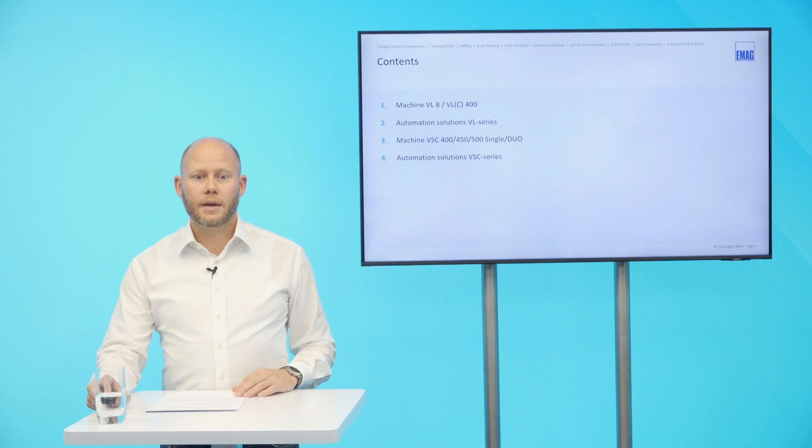We will begin with the VL series, and I will give the word to my colleague Konstantin. Thank you, Bernd. Here you can see a small overview of the VL series. The VL machines are the standard lathes at EMAG. I will briefly describe the different series.

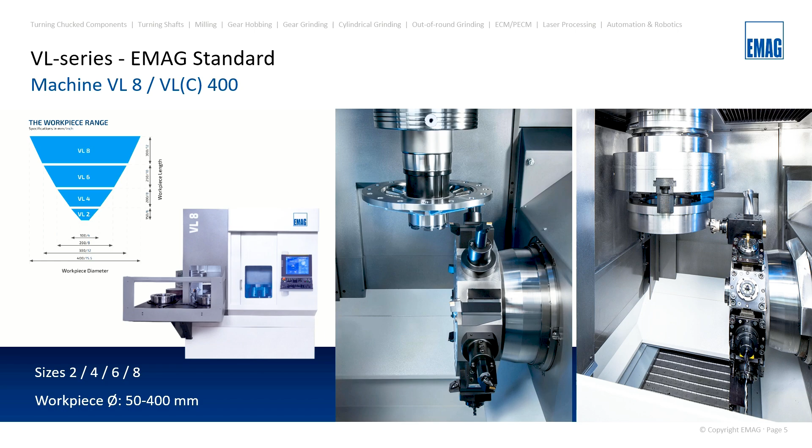In this slide we see the VL2, VL4, VL6, VL8, which differ only in component size. You can also see a section from the working area of our lathes. On the right, the turret with 12 places and the possibility of driven tools. For completeness, you can see the technical data such as chuck diameter, workpiece diameter, and the travel feeds in X and Z axis. We also have, as an option, a Y axis if necessary for the process.

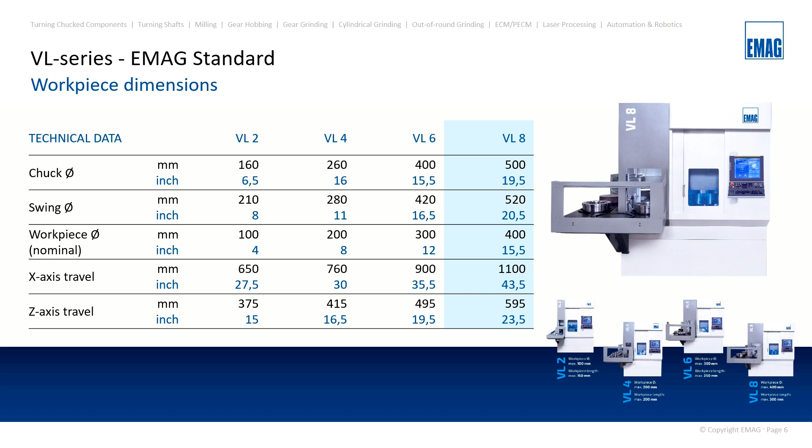Today, however, we only want to talk about the VL8 and our automation solution.

In the previous slides, we discussed the workspace and the possible size of workpieces. Now we show you the exterior structure of the machines and the associated components. In the front, the workroom door. On the right side, the control panel. On top of the machine, the spindle, the vertical spindle. On the right side, the electric cabinet, and behind it, the fluidics cabinet.

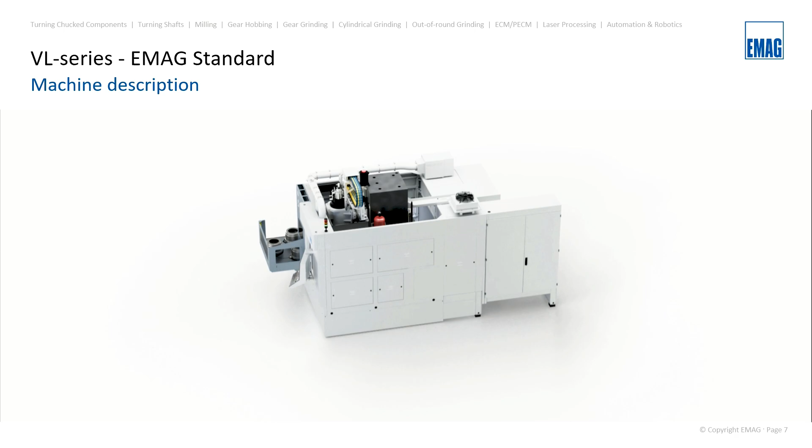Also on top of the machine, the extraction unit for the workroom and the cooling unit with the black fan. On the left side of the machine we see our so-called O-type conveyor, which is our internal standard automation in the VL series for manual loading on drag frames or workpiece-specific pallets.

Now I give the floor to Bernd. Thank you, Konstantin. I will follow with the automation solutions for the VL series, and for that we have prepared a 3D animation.

As we have just seen, the O-type conveyor is the standard solution for internal automation on a single machine in the VL series. If a machine is interlinked with a robot cell or several machines are connected together, the L-shuttle is used for automatic workpiece loading of the machine.

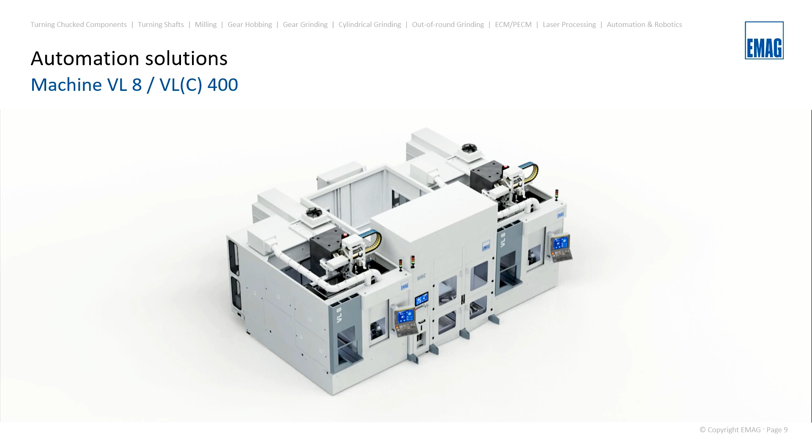Here you can now see our standard robot cell that can be attached directly to the machine. Furthermore, there is the possibility to add a second machine, then the robot supplies both machines.

The interlinking of machines can also be carried out via our in-house automation system, the so-called track motion. This track motion is a solution for 2 to 4 machines. The integration of other units, for example measuring or marking stations, is also possible.

The track motion travels through the automation tunnel of the machine on a railway system and transports the workpiece from one machine to another with an NC-controlled trans-lift unit. The workpiece can also be turned between stations. The in-feed and out-feed conveyor are also controlled by the track motion automation system.

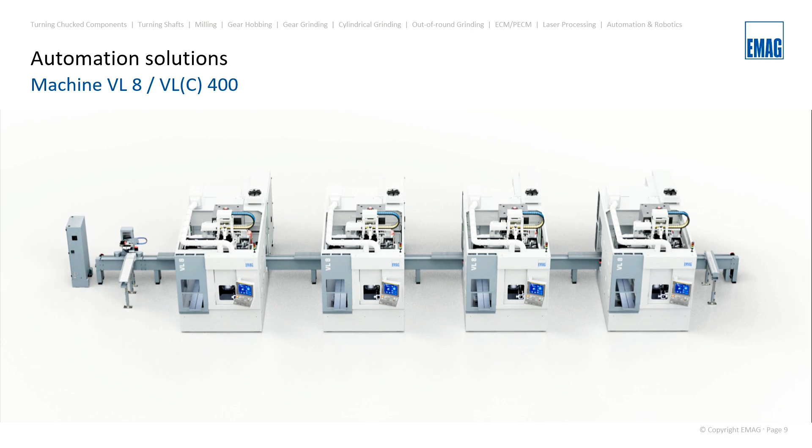This was the theory. Now we have the first realized project. This is only one machine with an O-type conveyor, but it has an interesting solution because we have the possibility for complete machining of the workpiece in 2 clamping positions on one machine.

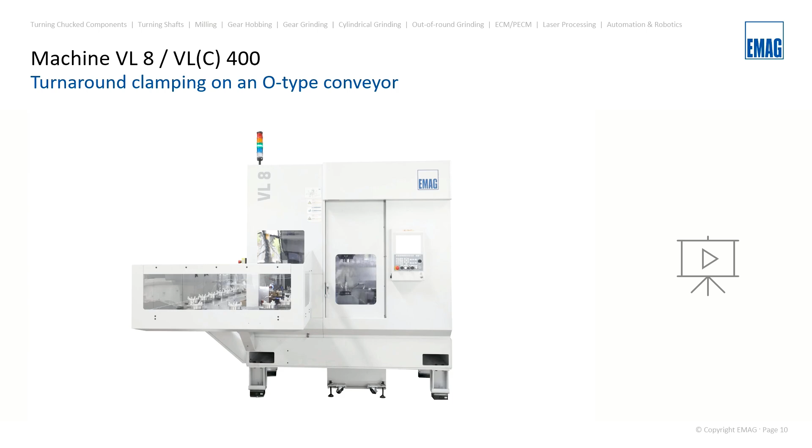The loading and unloading is with our standard automation, the O-type conveyor. With a turning station behind the pickup station, it gives us the chance to produce OP10 and OP20 if the diameters are similar, such as here in the example.

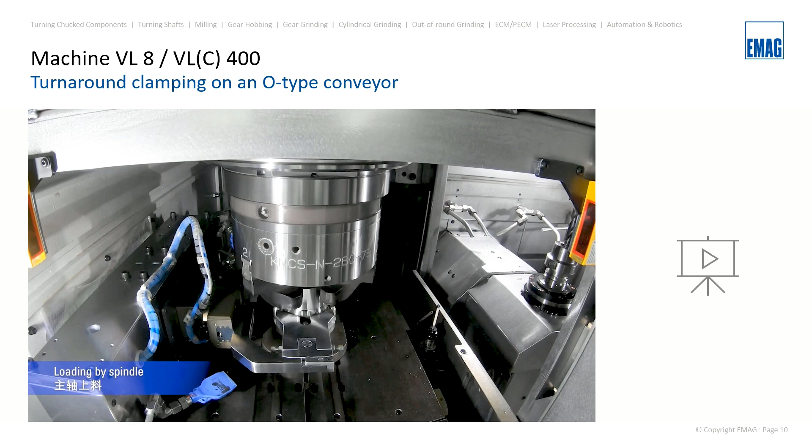As soon as the spindle has placed the OP10 workpiece, the station turns the component for OP20 and moves to a lower position so the spindle can grip the part. After OP20, the spindle places the component on the conveyor again and moves out of the machine.

Here you can see the raw and the finished machine parts.

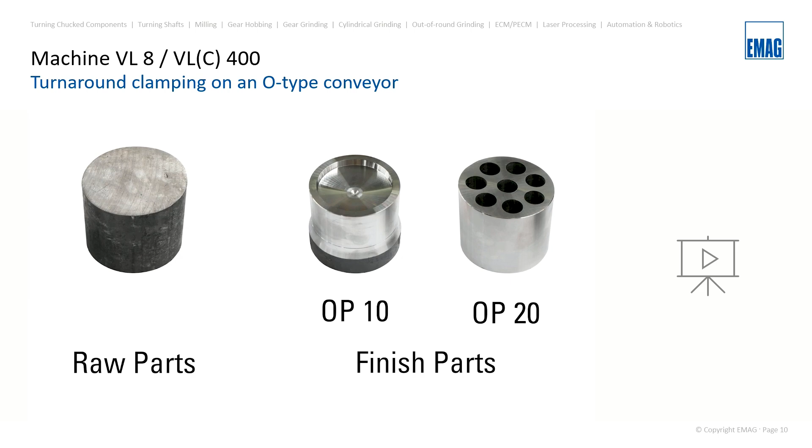The next example is a line which consists of 2 machines of the type VL8. This is a complete turnkey solution, a solution with a linear robot that can move in the axis.

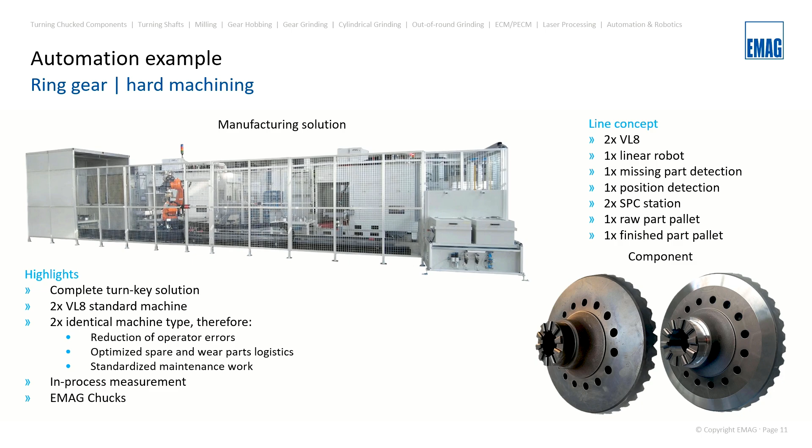We have as workpiece a ring gear, and the machining is a hard turning. The line consists furthermore of a missing part detection, a position detection, 2 SPC stations, 1 raw part pallet and 1 finished part pallet. Important to know is that both machines have the same machine content, so we have 2 machines with an operation 10. And therefore we have also a video prepared.

Before I start, I would like to explain that this workpiece must be aligned between the tooth flanks of the gear. Before this workpiece, it must be orientated. In this case, a laser is used. Now I start the video.

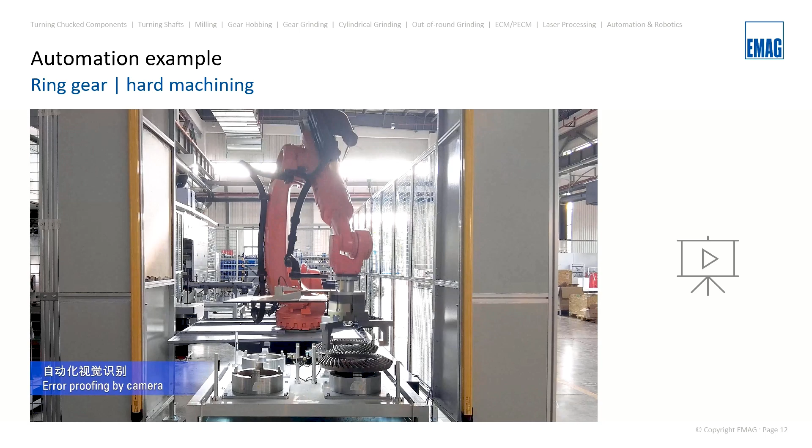First of all, there's an error proofing by camera attached to the robot. Then the picking up of the workpiece, and here the checking of the gear orientation with help of the laser. Then the orientated part is picked up and the toothing with the clamping device.

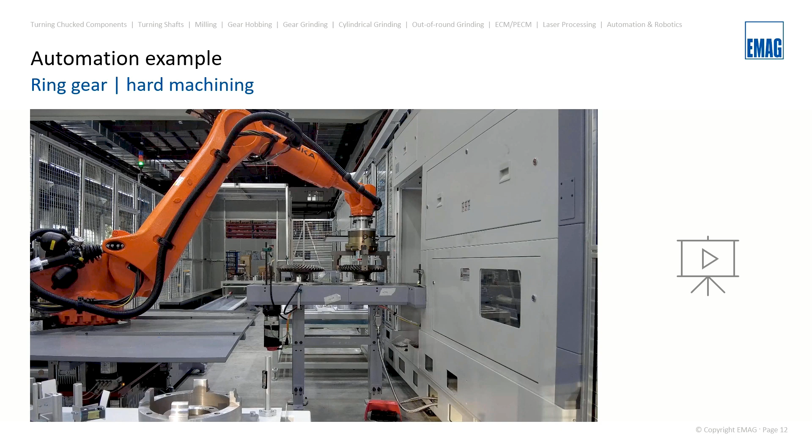Now you see the hard turning of the workpiece. After machining, a new raw part is loaded on the shuttle and the finished part is being unloaded by the robot.

And for the next example, I will give the word again to Konstantin.

Thank you. But we have a question from our audience. What is the difference between VL 8 and VL 400? Good question, I can answer this.

The VL 8 machine and also VL 2, 4, 6, they have a Fanuc control. And the other machines, the VL 100, 200, 300 and 400, they have a Siemens control. That is the only difference, and here we have the same machine. Okay, thank you. You're welcome.

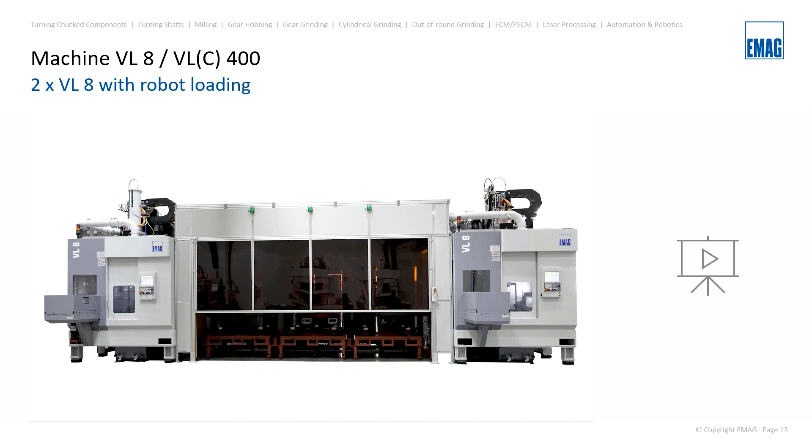In this example, we show you a video from VL 8 with the robot, with a robot cell in the middle of the line. Loading the raw parts. And now a visual position detection with the camera attached on the robot.

In the next step, we go to the regripping unit to turn around the workpiece. And now the component is placed in the OP10 on the raw part pallet. Unloading the finished part in OP10 from the shuttle. Here you can see how the workpiece is picked up by the pickup station directly with the spindle.

Now let's jump right into the finished part measurement with our internal test probe. And we measure the inner diameter.

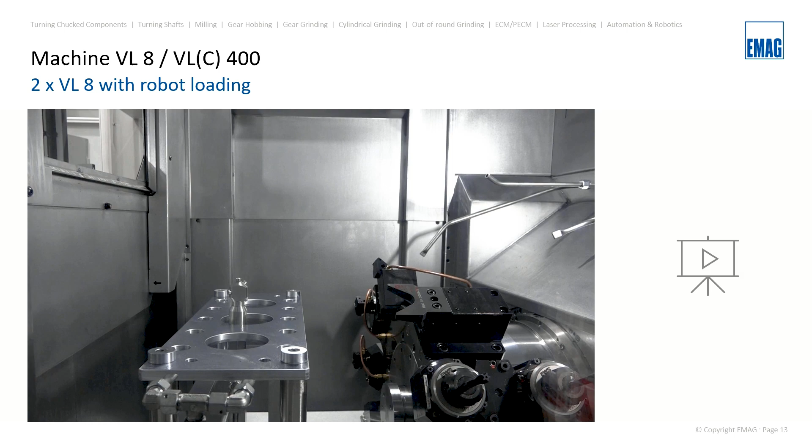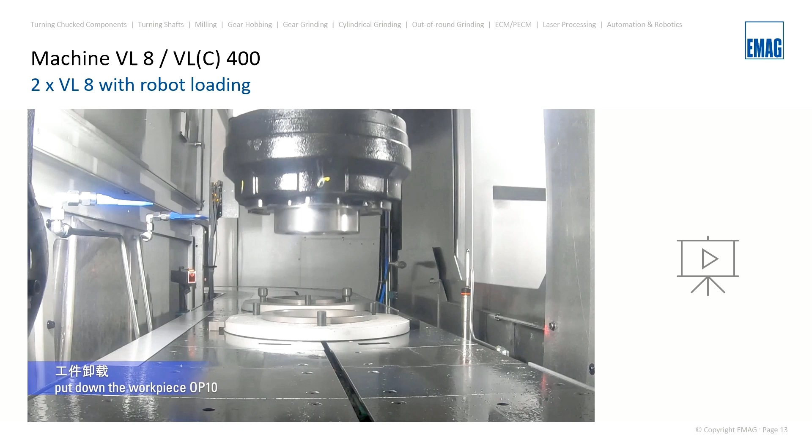Now we drive to the pickup station for unloading the parts on the workpiece pallet. Again, turn around the workpiece for OP20. And place it on the shuttle for OP20. After loading, we unload the finished part on OP20.

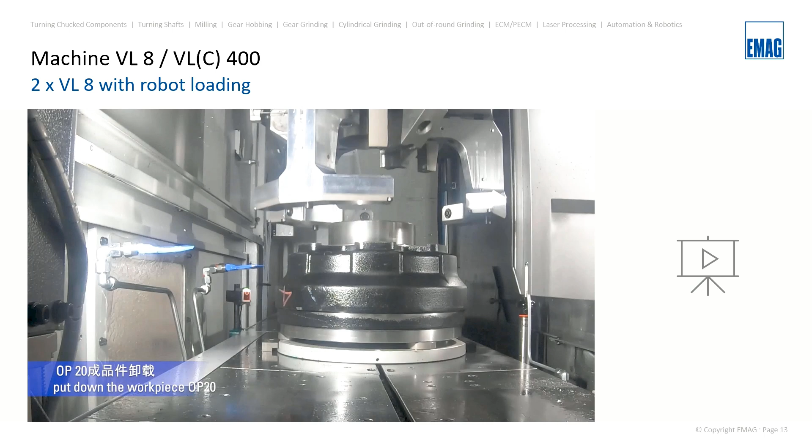In this case, we have an external clamping on the OP20 in 2 planes. The OP20 part is also unloaded directly. We have taken it out of the machine. Clean staging of the finished part.

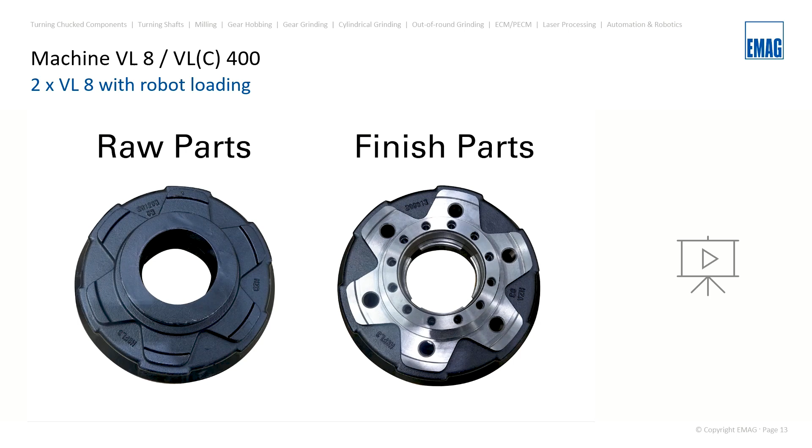After the cleaning, we drive again to the regripping station to turn around the part. After this unit, we are loading the finished part onto the pallet. And here we have the comparison of raw and finished part.

Here we have a simulation of the layout shown above. EMAG has the ability to use the simulation to analyze sources of error, increase capacity, and determine the use of buffer strategies through the different configurations so that the best possible availability is achieved.

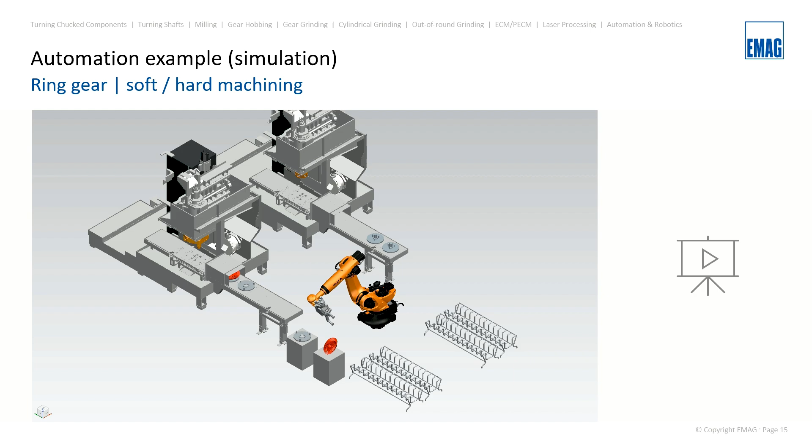And now we go to the VSC series. And then, Bernd, please. Thank you, Konstantin, and thank you for the last example. This is an important tool, the simulation, to get the best availability for our customers.

To start with the VSC series, the C in the name of the machine stands for customized. These machines are intended for customer-specific applications.

What does this mean? First of all, I can show you on the right side here. This is a work area with our standard turret with 12 positions, and of course, the possibility of driven tools. You need these driven tools for milling or drilling operations. However, there is also the possibility of implementing special applications with these VSC machines.

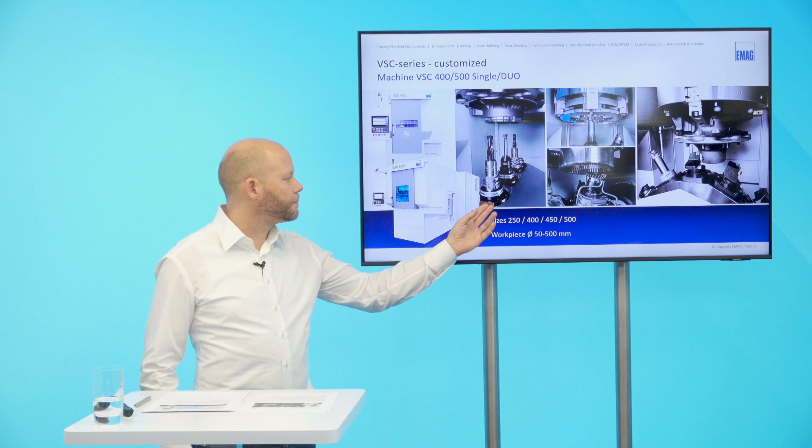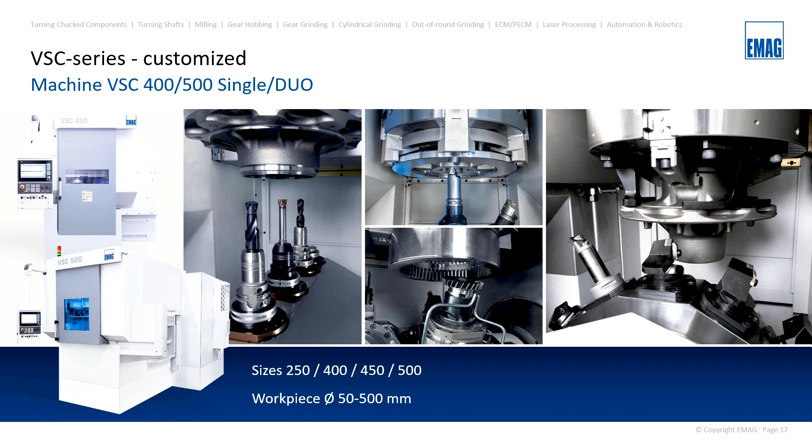For example, on the left side here, you can see a multi-head drilling unit. A multi-spindle was mounted instead of the standard turret. This was removed, and the unit is only for drilling and reaming. Furthermore, the machine can be equipped with an additional milling spindle. You can see this in the middle. Here, for example, you have the possibility to make a power skiving operation.

We have again a question about automation in the VL series: up to what diameter can track motion be used?

The track motion, our internal automation system, can be used with the same diameters as the machine. For example, when you have a VL8 machine, the maximum clamping diameter is 400 millimeters, and the automation system can also handle parts with a maximal diameter of 400.

It's clear, thank you. You're welcome. Okay, then we go further on.

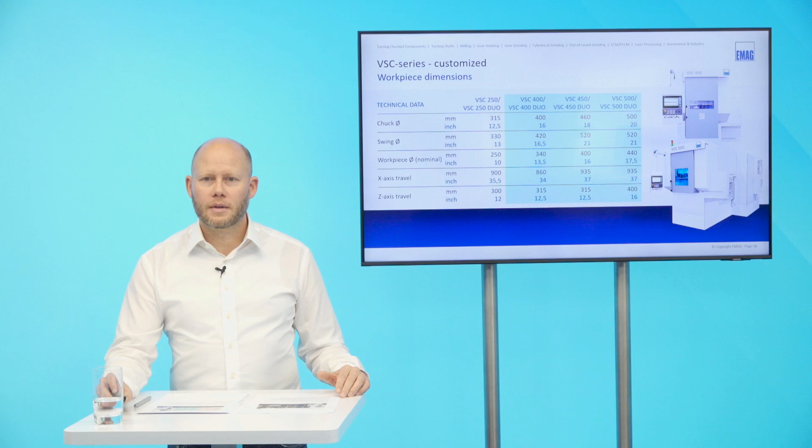Here you see the technical data of the machines. We have 4 machine types of different sizes: the VSC 250, the VSC 400, the VSC 450, and the VSC 500. All machines are available both with a single spindle and with a 2-spindle version, the so-called duo solution.

For you as a customer, the maximum workpiece diameter is important, and we can go up to 440 millimeters for our biggest machine, the VSC 500. Today we want to take a closer look at the sizes 400 and 500 and show our implemented automation solution for these machine types.

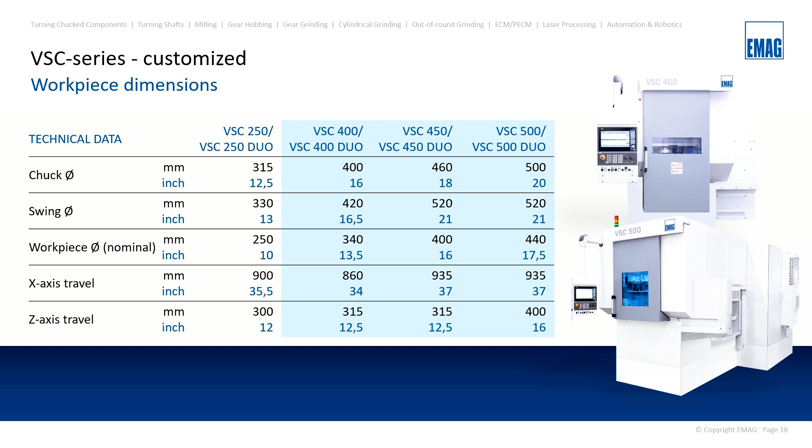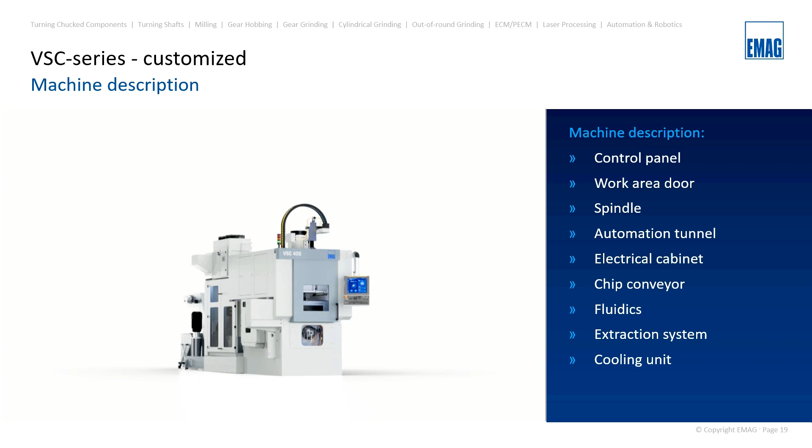First of all, we have prepared a 3D animation to show you and describe the machine itself. At the front you can see the workroom door with a view inside the workroom, and on the right side the control panel.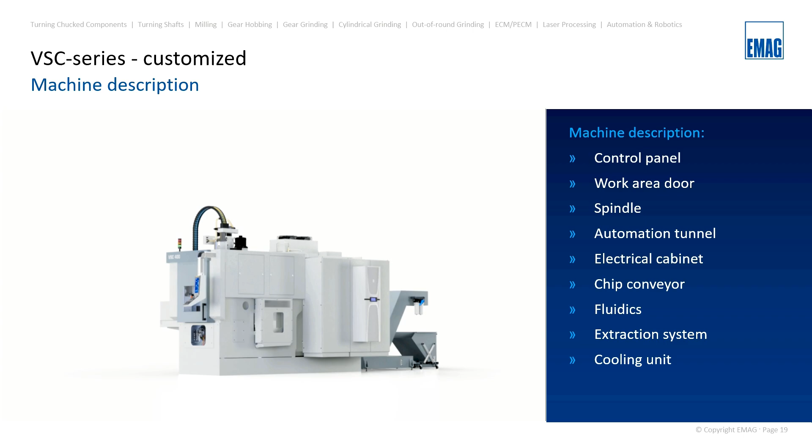On the top view you can see the spindle, which is arranged on a pickup station, always in vertical position. Now you see the control cabinet, and in the back the chip conveyor, which can also be arranged to the left or right side of the machine.

We have the fluid container on the left side of the machine with all pneumatic and hydraulic units, and on the top we have an extraction unit on this side, and the cooling unit also on top of the machine.

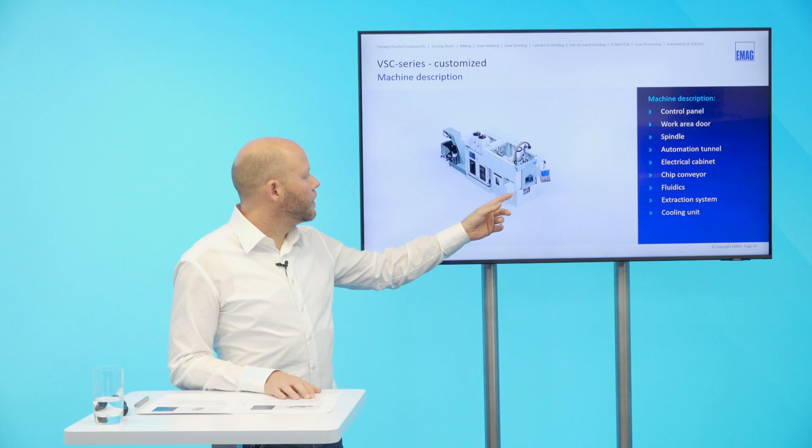Important is also this automation tunnel, in the backside of the working area. In this automation tunnel there is space for the workpiece conveyor belt, which we call the shuttle. On this shuttle the parts are transported into the machine to the spindle, which picks up the workpiece with the help of a chuck.

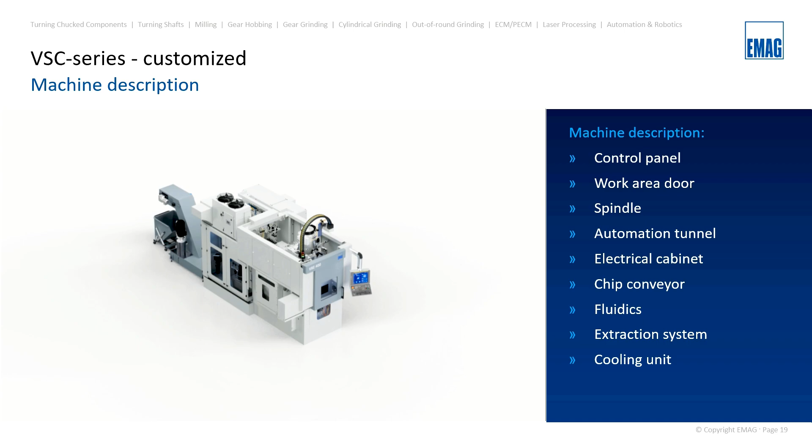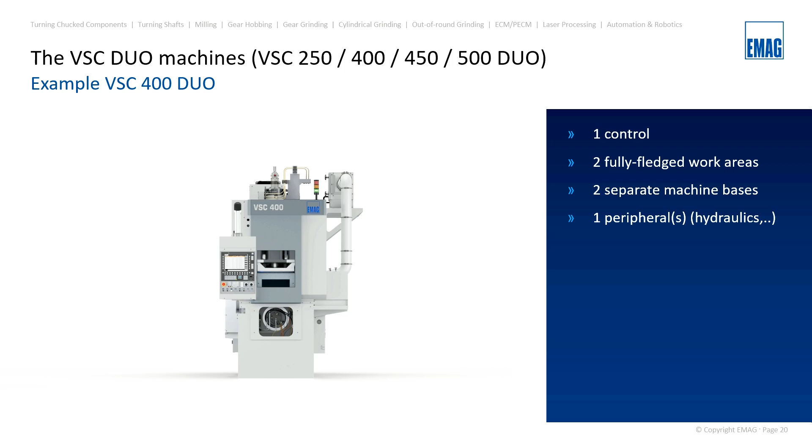Now we explain how a single machine becomes a duo machine. A duo machine consists of two separate work areas: two individual machine beds integrated into one machine together, but with only one control and energy container. The big advantage is that these two separate base bodies prevent transmission of vibrations during machining.

These two separate spindle boxes are universally movable in all axes, so they are not coupled. You can do operation 10 in one and operation 20 in the other work area.

The turning of the parts between the operations takes place outside the machine. This machine is often used when the customer has little space available on the shop floor, because we have the smallest space requirements for complete machining of a part in two clamping positions.

For the next automation solutions of the VSC series, I will give the word to Konstantin, and he will present the first solution. Thank you.

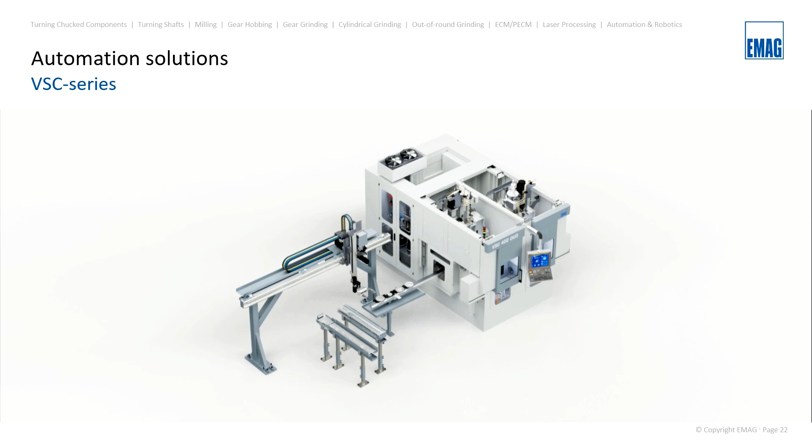Here we can see a simulation of different automation solutions. A single machine with shuttle on the left, possibly also on the right. The shuttle can be loaded directly via robot or via an EMAG gantry loader with a loading and unloading conveyor.

In this example, with one gantry loader, we have the option of machining up to 4 operations, with the flow direction from left to right. The component would be transferred from the gantry loader to the machines via an in-feed conveyor, where the processes OP10 and OP20 are performed.

The gantry loader then collects the semi-finished part and places it on the shuttle into the second machine, on the right, where operations 30 and 40 are processed. The finished part is picked up again by the gantry loader and placed on the outfeed conveyor for unloading.

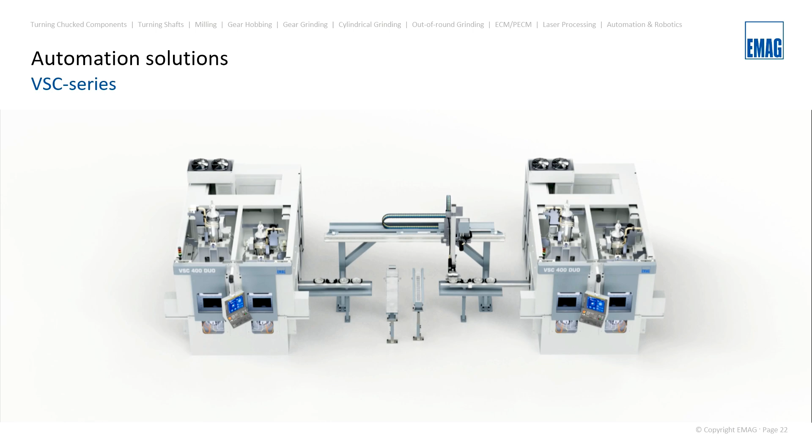Here we see a short simulation from above. On the left, you can see the dual machine with a shuttle and the gantry loader, and the infeed and outfeed conveyor. The sequence is: the gantry takes a part from the infeed conveyor and places it on the shuttle. The gantry takes the OP10-finished part and places it on the pallet of OP20. It then picks up the complete finished part and takes it to the finished part conveyor.

Here again is an automation example from VSC 400 DD machines for the truck differential housing. It's a complete machining line. We have 3 VSC 400 DD machines, 2 gantry loaders, 2 SPC drawers, 1 raw part conveyor, 1 finish part conveyor, and 1 cooling system. It's a complete turnkey line—machines and automation all complete from EMAG.

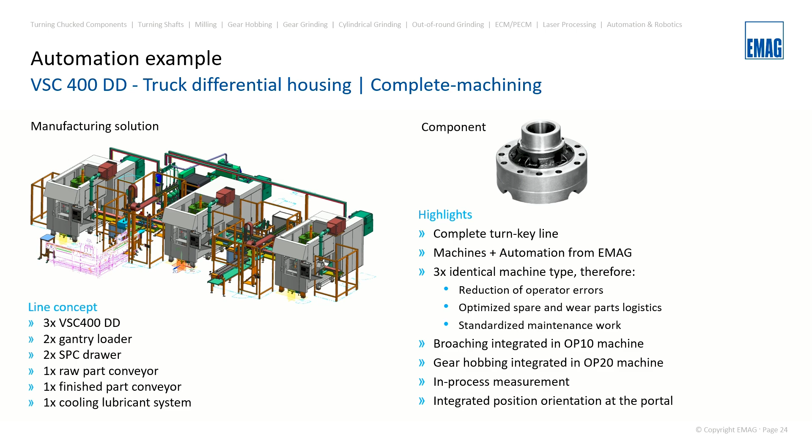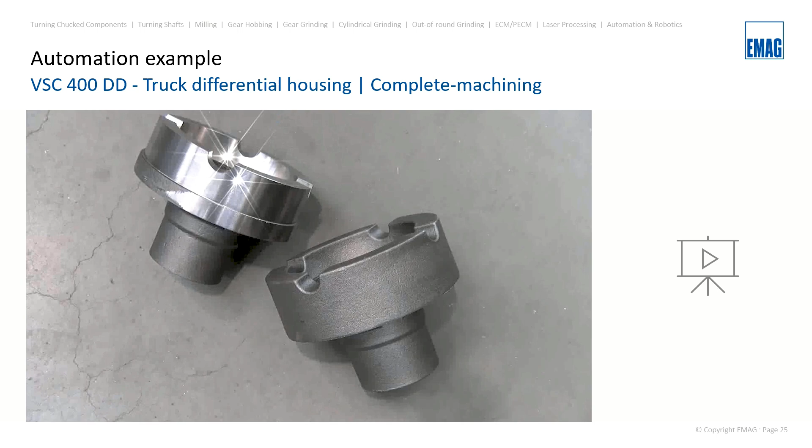Here you can see how the blank is gripped with a gantry loader and the orientation is determined by a sensor. The workpiece is pre-oriented and placed on the pallet.

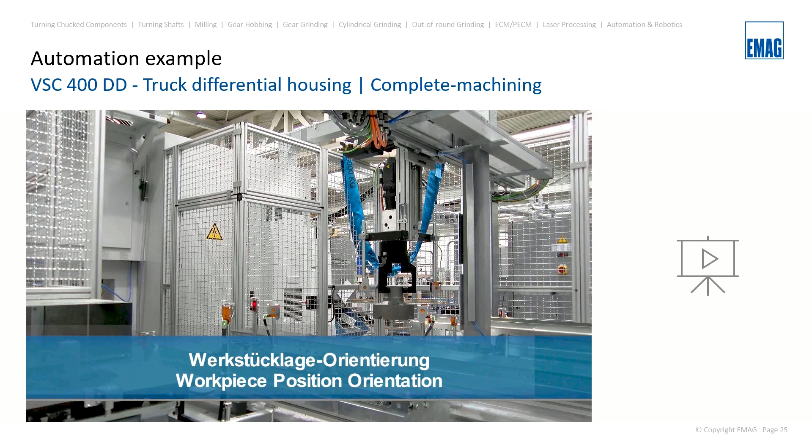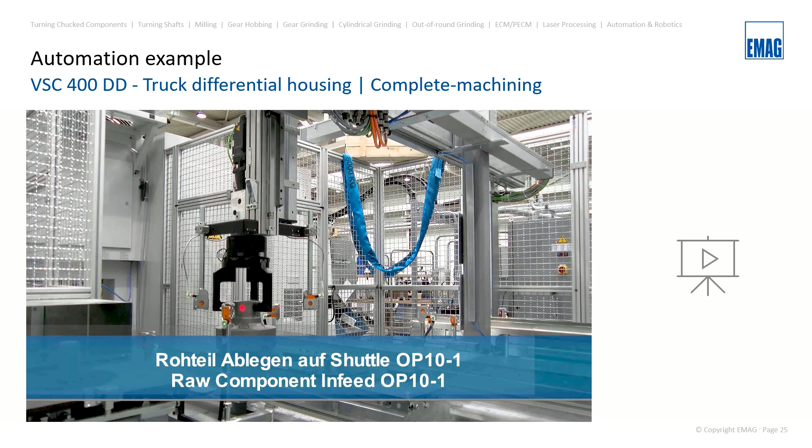Now we drive into the machine with the shuttle. The sensor performs the fine orientation in the clamped state. You can also see a small section from the machining process.

Milling the groove, deburring the groove, and broaching the groove. After the machining, the part is placed back on the shuttle and moved out of the machine.

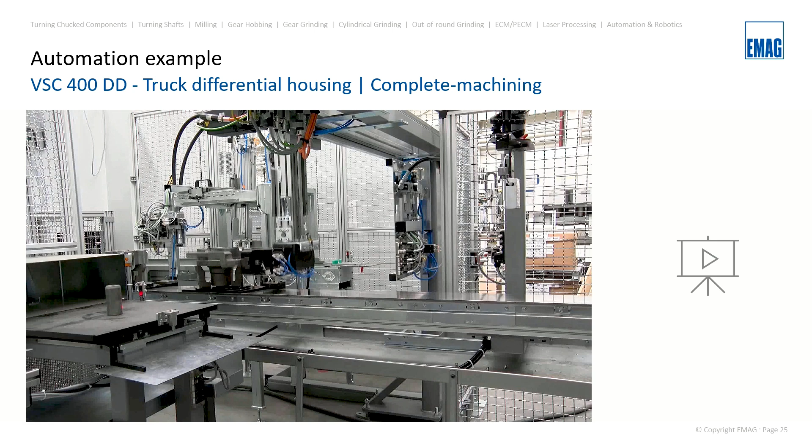The part is turned around and placed on the shuttle OP20. Here we can also see a small section from the machining process, such as turning, gear hobbing with a fixed side spindle.

At the end, a quality check is carried out with the internal measuring probe. Here only the lengths are checked.

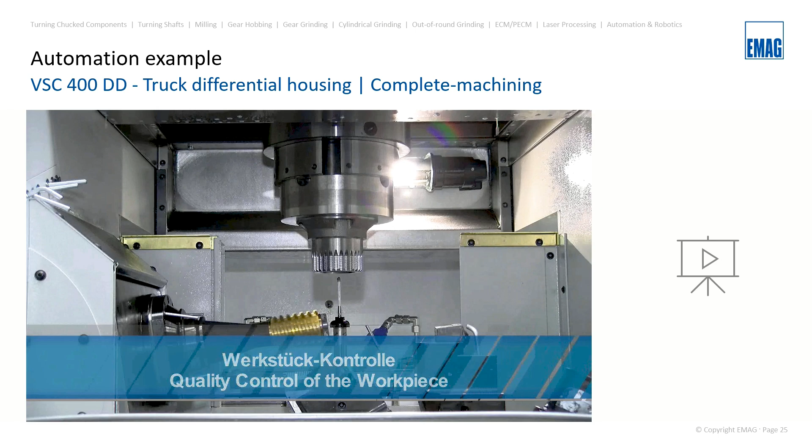So, we have again a question from our audience. Is it possible to integrate more machines into the line VSC series?

Yes, of course. At the moment we see examples for 2 machines, but it is also possible to integrate more machines, so 3 or 4 machines. Normally, the complete machining of a workpiece needs 2, 3 or 4 setups, and therefore you need the number of machines, and all EMAG solutions can handle this.

If it's a robot cell or automation with a gantry loader, we can integrate more than 2 machines, of course. Yeah, okay.

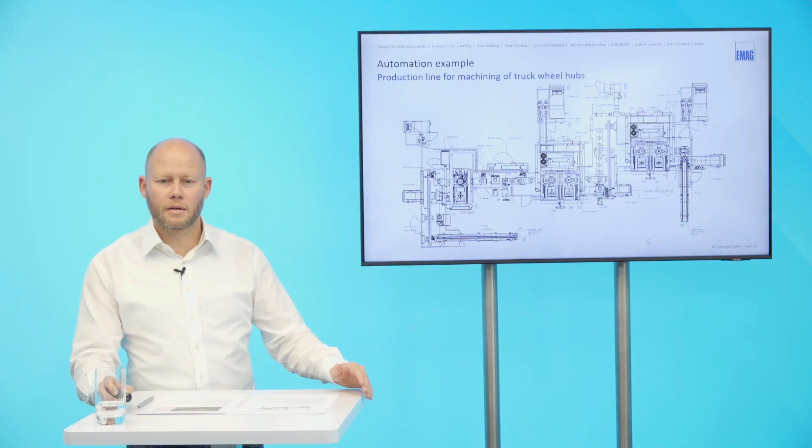Thank you. Good question and good next example, because here you can see a production line for machining of truck wheel hubs. This is a bigger line with in total 3 machines, 2 VSC 500 duo machines and 1 VSC 500 machine.

And I will now guide you through this line and show you the raw part is placed on this in-feed conveyor and moves to this position. Here we have a stopper and a separator so that this transfer unit can pick it up and bring it to the shuttle of the OP10.

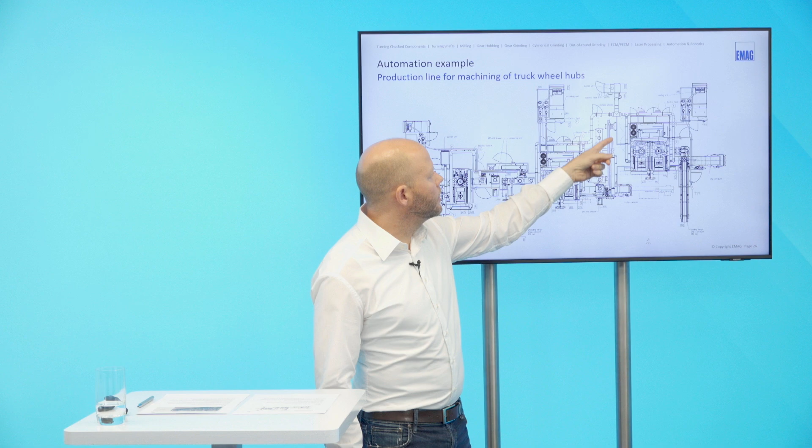The shuttle transfers it into the machine where the spindle can pick it up and machine the part. After machining the part, the shuttle transfers it to the end position, and the first gantry loader picks the part and puts it on the shuttle of OP20.

When OP20 has an error or a tool change to do, then the gantry loader will put the parts on one of these buffer places so that the OP10 machine can work further on. In a later stage, you can pick it from these buffer stations. So we guarantee that the line never has a stop.

Here you also have the possibility to put out a part for an SPC control. And here is the SPC drawer. You can put it out and after checking, put it back again to the line.

When we go here to the OP20, we have also a double spindle machine. And after machining of OP20, the shuttle brings it to this position.

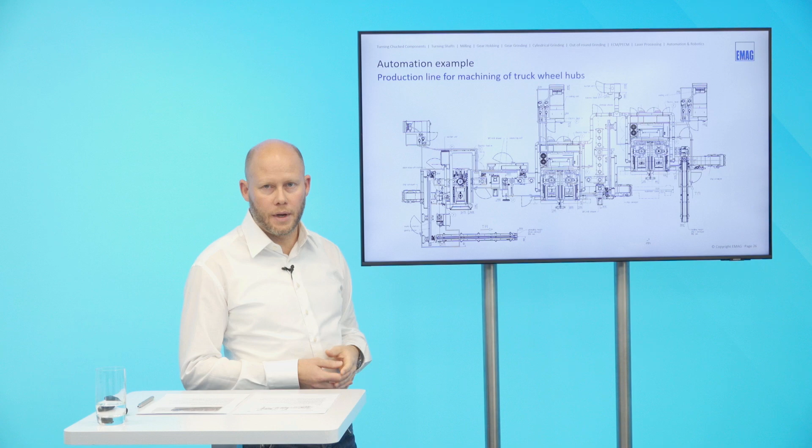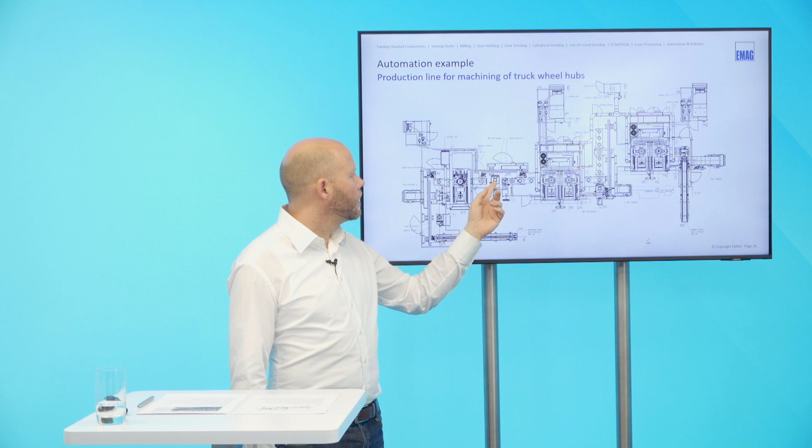First of all, the second gantry loader now brings the part to a measuring unit in this place. 100% measuring is necessary here, to check if the part is okay or not okay. If it's okay, the gantry loader brings it to the OP30 shuttle. When it's not okay, here is an N-OK drawer to put the part out of the line.

Now we are in OP30. The OP30 is a single machine. The reason is because the cycle time is only half the time of OP10 and OP20, and so we have only a single spindle and do not need a dual machine at this place.

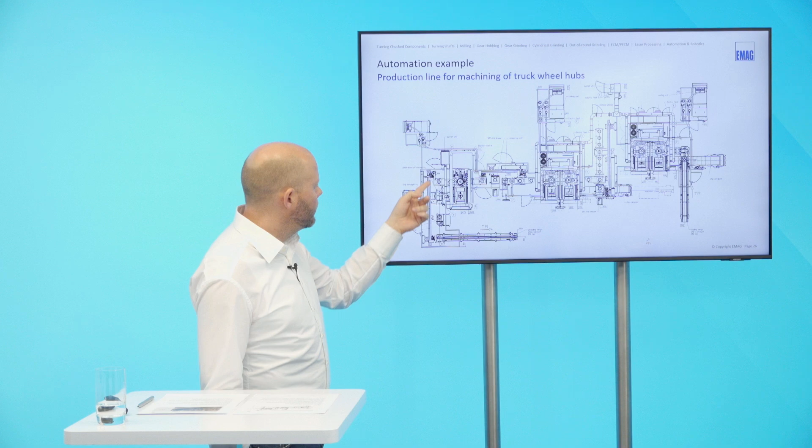After machining OP30, the third gantry loader picks the part from the shuttle, first of all to a cleaning station to blow off the chips. When the part is cleaned, we have here a marking station where a needle marker puts the data on the workpiece.

And at the end, the gantry loader places the finished part on this outfeed conveyor, and you can take the parts off at the end. So a nice and interesting example of how you can combine VSC machines with gantry loaders.

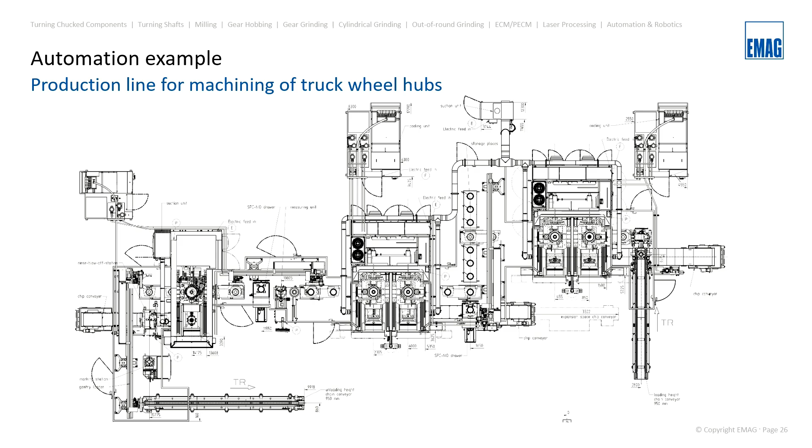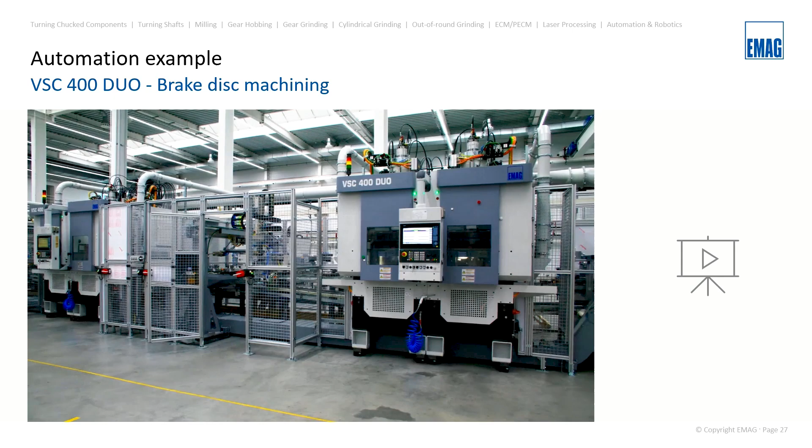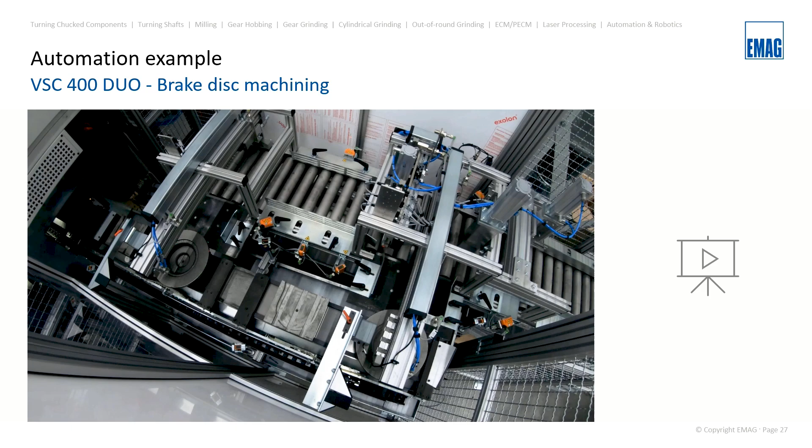The next example, we will show you a video of our next bigger line. Here we see a large line for the machining of brake discs. Usually brake discs are turned and drilled in 3 or 4 setups, and we use therefore a VSC 400 duo machine. From the in-feed conveyor, the parts are pushed via a pusher onto the shuttle for the first operation.

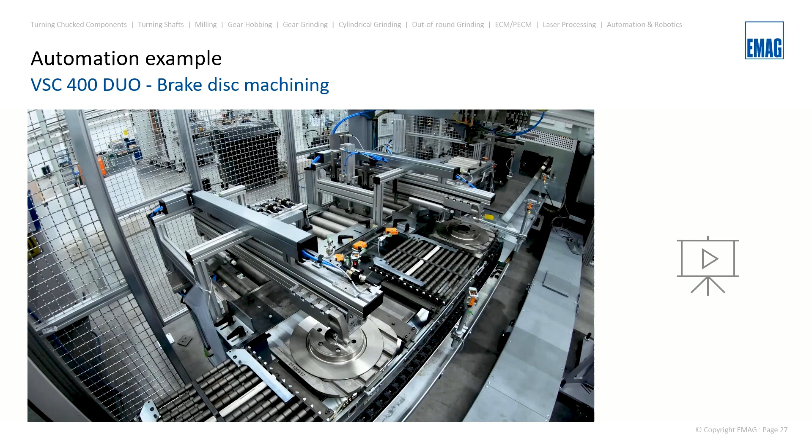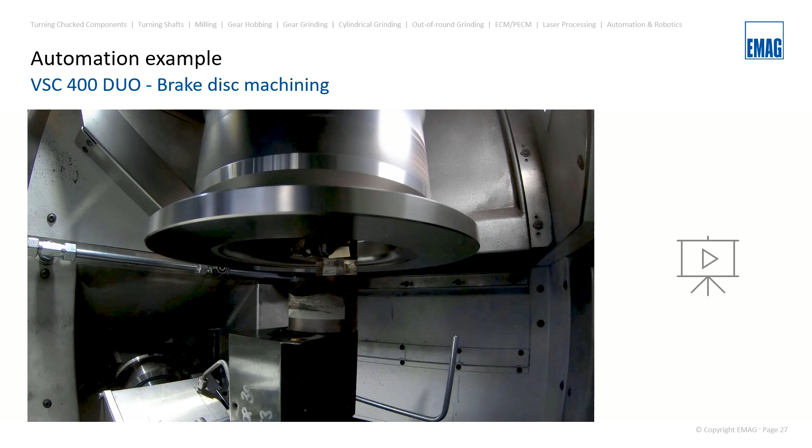Now you can see the machining of OP10, the pre-turning of the first side of the brake disc. The parts are pushed back on a conveyor by the shuttle, turned with a double gripper, and placed on the OP20 shuttle. The shuttle brings it to the pickup position, and in OP20 the second side is pre-turned. Then both brake surfaces are turned at the same time with a double tool. After OP20, the parts are pushed again onto a conveyor and then finally onto the OP30 shuttle, where the last operations take place: the inner contour is turned and the holes are drilled.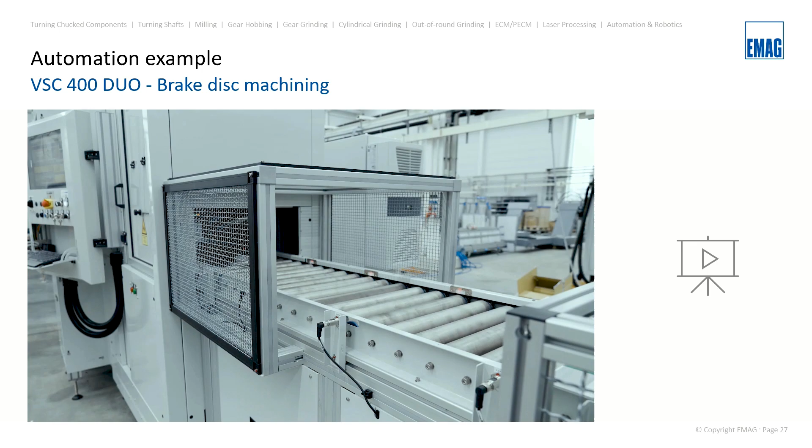Finally, the parts go into a laser marking station, where for example a barcode is applied. After laser marking, usually a measuring station follows, and finally the component is balanced.

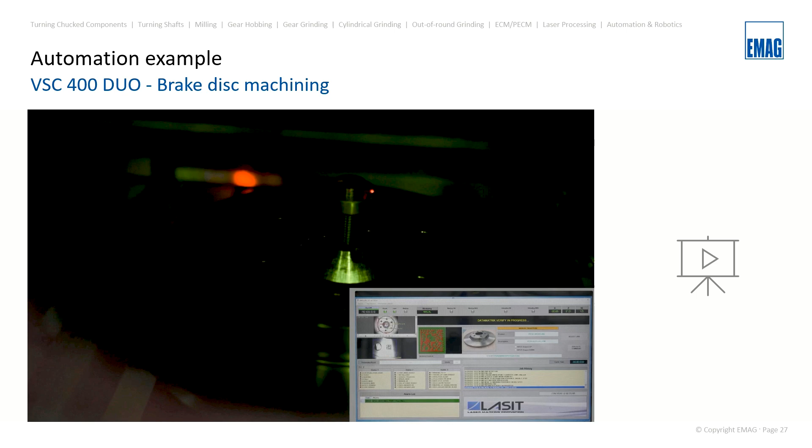First of all, we have a new question. Has the line for the wheel hubs actually been implemented in this way, or was it just a layout for the slide, the big layout? The layout, yes, but it was not only a layout. This line was built, mounted in our shop floor, and is already delivered to the customer and is now producing. So it's a realized project. Yes, thank you. You're welcome.

In this slide, a realized example. I will show you the layout, and my colleague will then show you the real video.

Here we see two VSC 500 Duo and one VSC 400 Duo machine. In addition, we have 3 in-feed conveyors, 3 storage boxes, 1 robot that sits on rails and is movable, 2 cleaning stations, 1 needle marking station, 3 turnaround stations, 1 changing station for robot grippers, 1 SPC, and 1 NOK-drawer. So we have installed everything you need for automated production in this line.

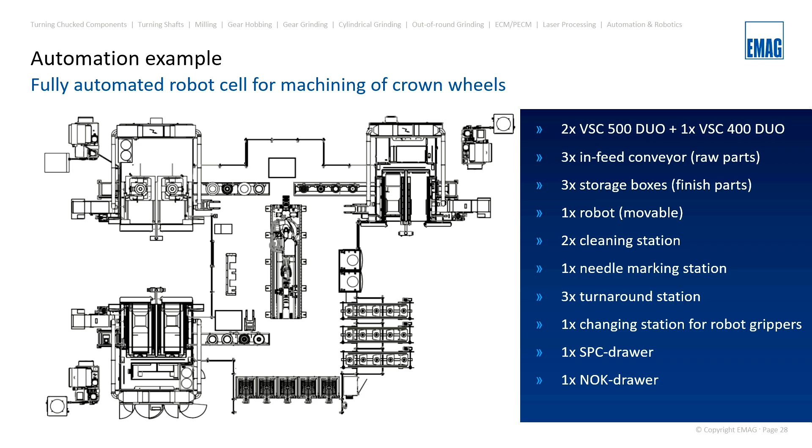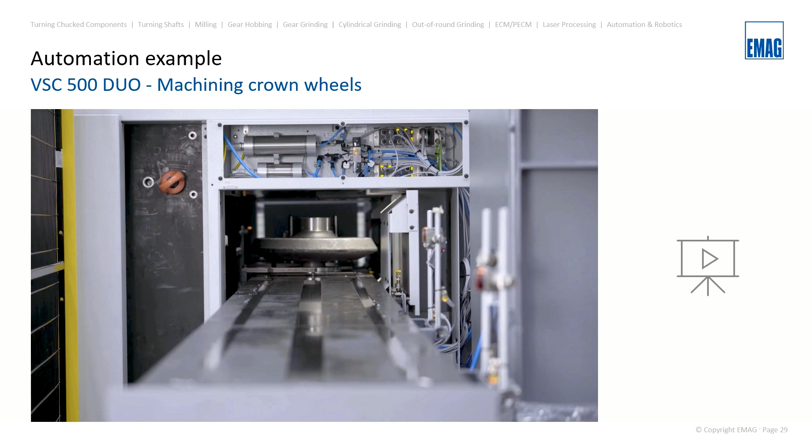Here you see the production cell from the top view, a nice overview of this line. When we start the video, you can see the workpiece is gripped from the in-feed conveyor and first placed on the OP10 shuttle. The shuttle takes the component to the pickup station where it is picked up by the spindle.

We only show the automation, not the machining. After OP10, the part is placed on the shuttle and transported out of the machine, where the robot brings the workpiece to the cleaning station. This happens in a clamped state, so the robot clamps the part and the cleaning station blows off the chips. You can also see here the overview and the second cleaning station behind.

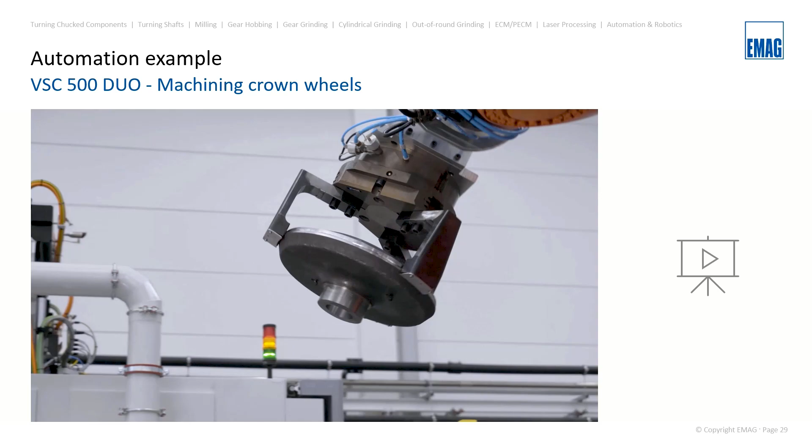After that, the part must be regripped. For this, there is a turnaround station on each machine, and the workpiece is placed on the fork and then regripped by the robot, to put the part back on the shuttle at the position for OP20, to turn and machine the other side.

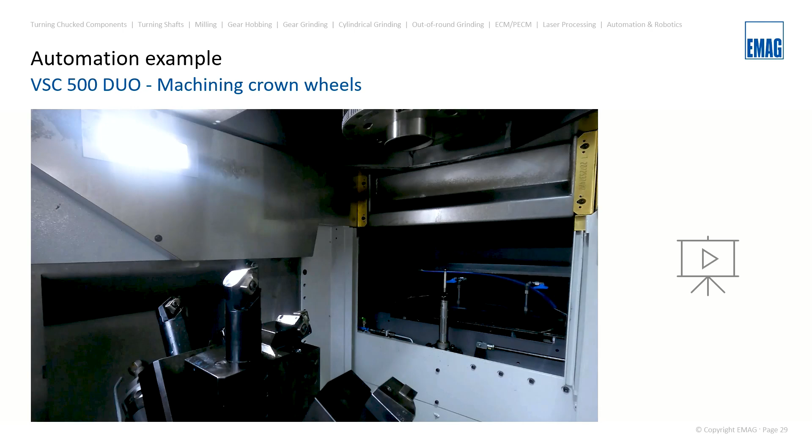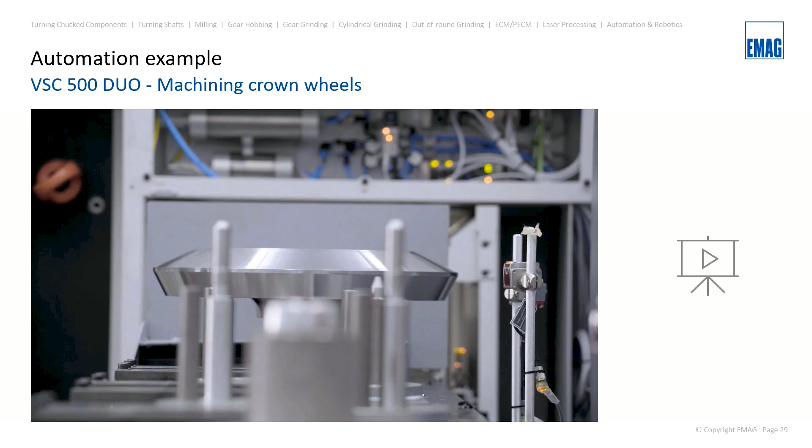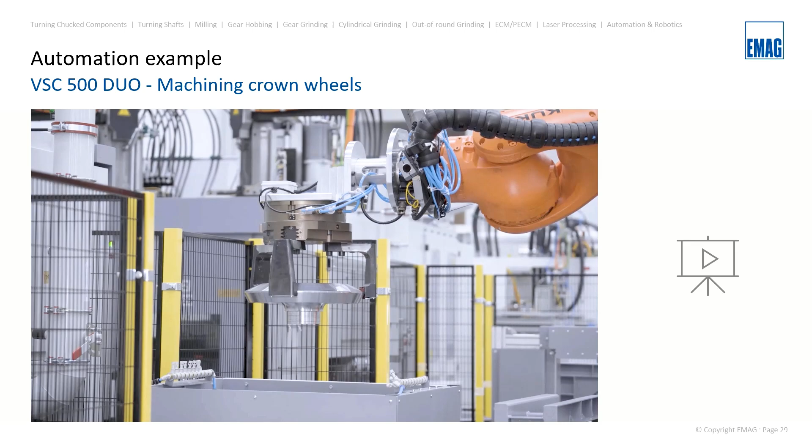We only show the automation and not the machining content because the cycle time is over 15 minutes and we want to concentrate on the automation, just for information. After machining, the process is repeated. First, the part is blown off again - now it's the finished part, and the blow-off process has to ensure no chip is on the part. Then again, the part has to be turned and regripped by the robot. Here you can see the robot fly - nice animation.

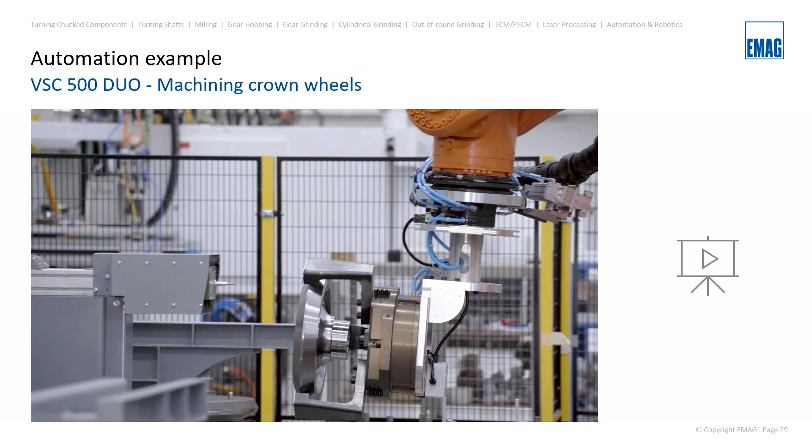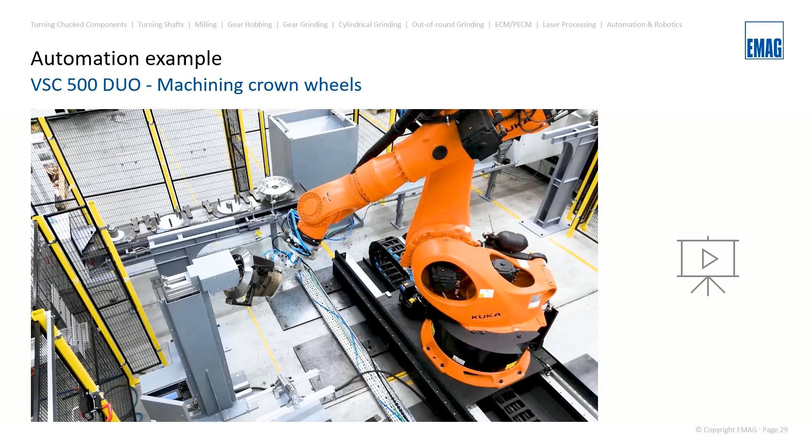The next station is a needle marker. Here workpiece data can be marked, like the type of workpiece, or production information like date or time. Finally, the robot moves to the storage basket and places the finished part there.

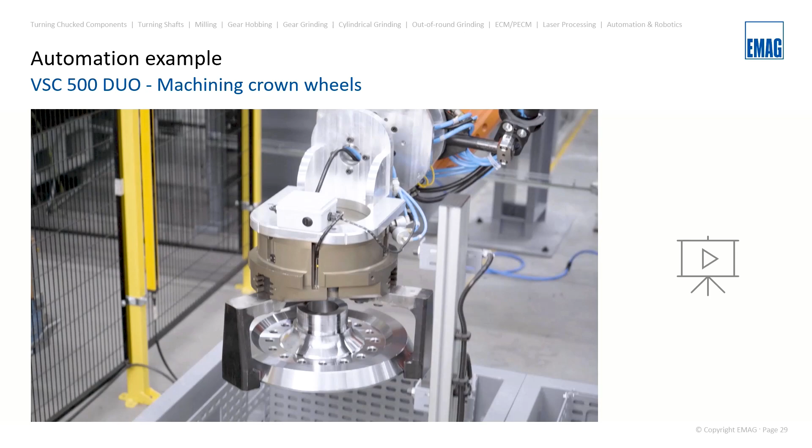So that was our last automation example for large workpieces. And before we come to an end, the question to Konstantin: have we any questions?

Yes, one, I think this is the last question: what is the weight of the crown wheels you see in the video? In the last video, the crown wheel, the weight was, I think, 70 kilograms for the raw part. And interesting - the finished part has only 50 kilograms, so we are making 20 kilograms of chips in these two operations. This is also a lot.

Okay, then do we have another question? Yes, we have another question. If you want to, well, can you read the question?

The question: if you want to replace a series of lathes to machine a ring gear with a broaching machine already positioned and impossible to move, will it be possible with EMAG automation? I think the question goes a little too much into detail, and we can answer this a bit later - we will answer it after this webinar. It's necessary to know the broaching machine which is already in use, and whether we can handle this with EMAG automation.